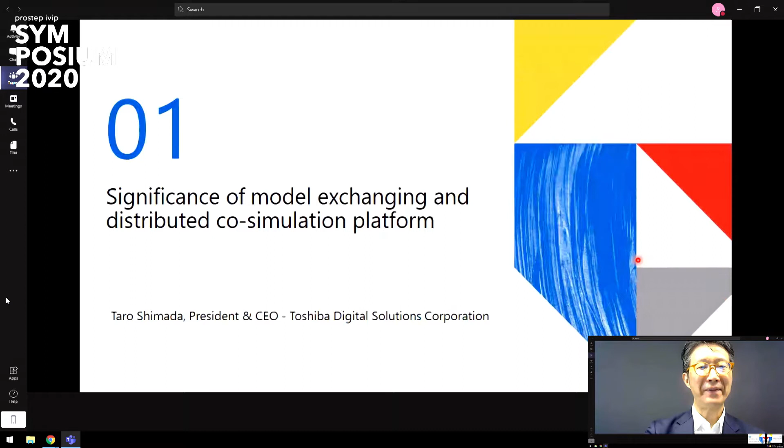So the first thing I'd like to explain is the significance of model exchange and distribution in the co-simulation platform. With this audience, I don't think I need to explain in detail, but we need to front-load much more in design, in a digital simulation way, so that we can do a much more effective job. Not because of COVID-19, but it's a big theme of system engineering anyway. At the same time, this requires the OEM and suppliers working collaboratively, easily and very tightly together, but they also need to respect their intellectual property. And there's a challenge in that there are all kinds of different tools that we use to do the simulation, and sometimes it's very difficult to exchange the model itself. Actually doing a co-simulation is quite a challenge in front of us, I think.

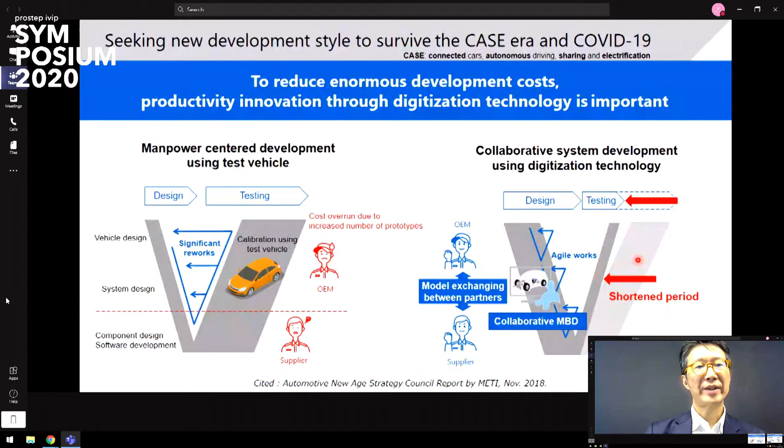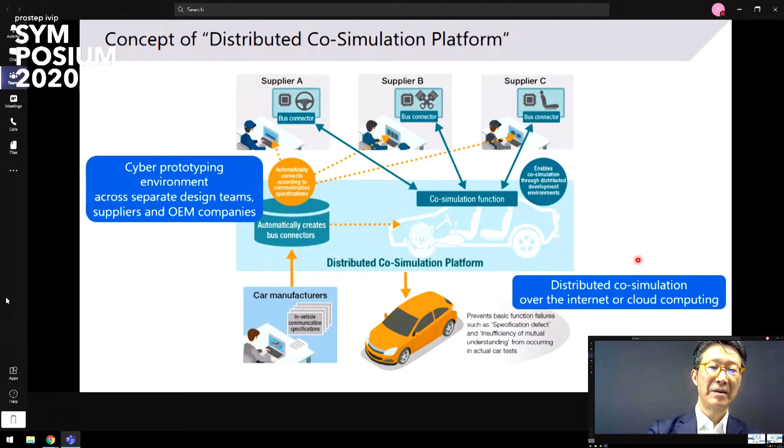On top of this, we actually make it a much more platform-like software, so that you can simulate different types of software all together at the same time. Maybe it's easier to explain with the next slide I'm showing right now. All these different software have already been tested and are working, meaning all of them co-simulate at the same time. Basically we use the FMI interface to do that, so that in theory any software which complies with the FMI standard should be able to do the same.

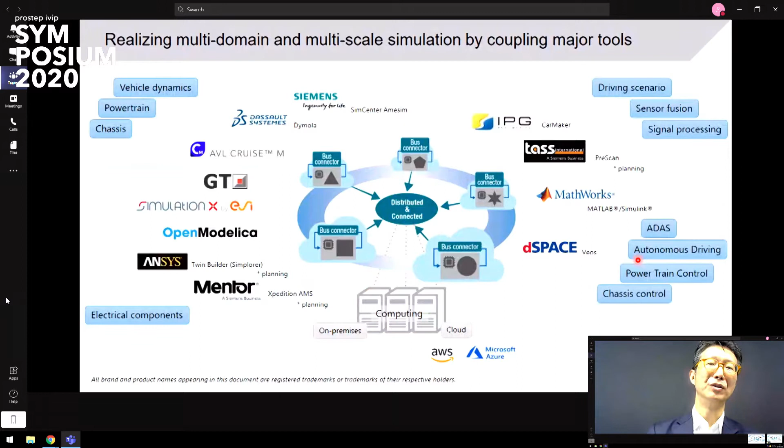We are actively working very closely together with standardization organizations. Here in Japan, METI, the Ministry of Economy, Trade and Industry, is leading the activity of the model-based design working group, and we are working very closely together with many Japanese companies, supplying all those technologies to be able to do this kind of co-simulation.

At the same time, we are happy to join PROSTEP, because this is not only a problem for Japan, this is kind of a universal problem that we have. We think we can contribute to the global supply chains for the people who really need to do co-simulation together.

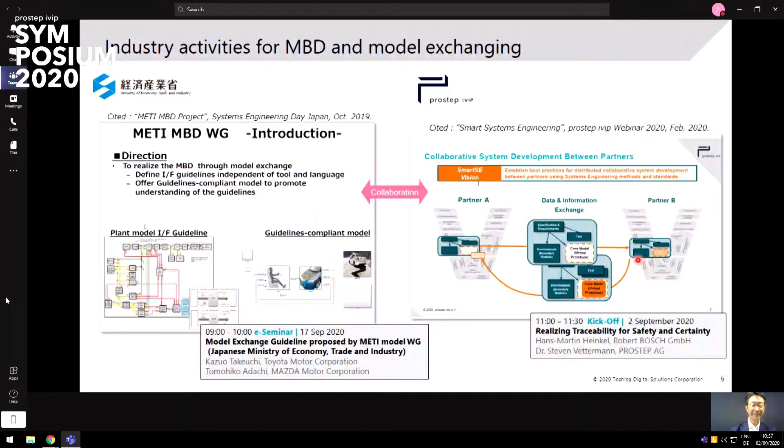So I wonder, this story is too good to be true. Then people are wondering how, is that really true, and so forth. Dr. Araki is going to explain about that in detail, how we solve this problem. So without further ado, Dr. Araki. Thank you, Mr. Shimada.

From now I will explain the details about the distributed co-simulation platform technology and its applications.

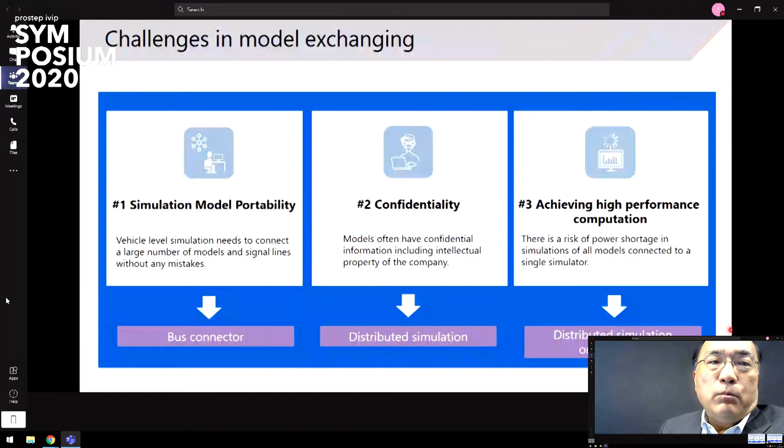Today I want to explain three problems in model exchanging, and on the other hand show how to solve these three problems. The first is the portability of simulation models to exchange across companies or partner teams. The second problem is the confidentiality of the models. The third topic is how to achieve high performance computation in building large-scale co-simulation.

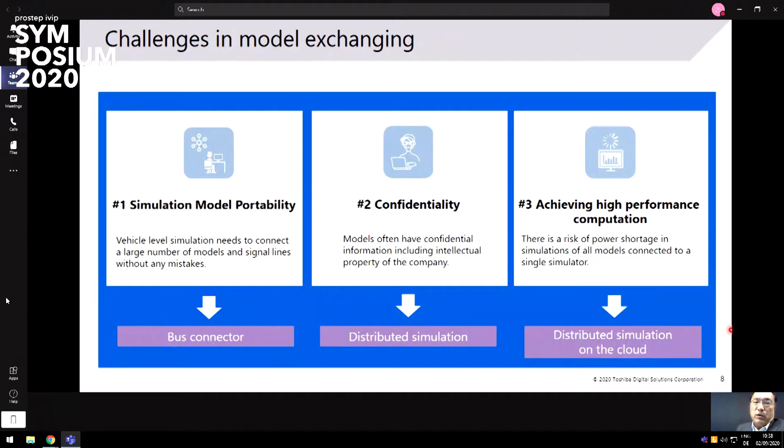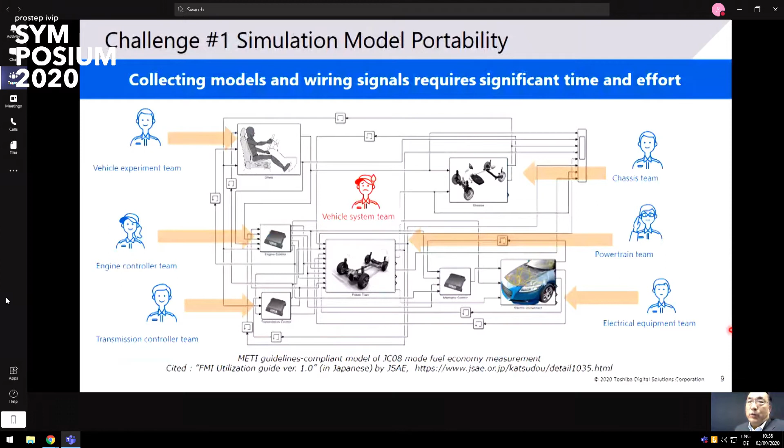The first problem is the portability of the simulation model. This is one example of a vehicle-level simulation model developed by the METI model-based design working groups for calculating the fuel economy measurement of vehicles.

To make this kind of simulation, the vehicle system designer needs to collect the unit models from their partners. For example, the engine controller needs to connect with the transmission controller, or some chassis model, or powertrain model. This kind of model needs to be collected, and wiring the many signals requires very significant time and effort for building the whole simulation.

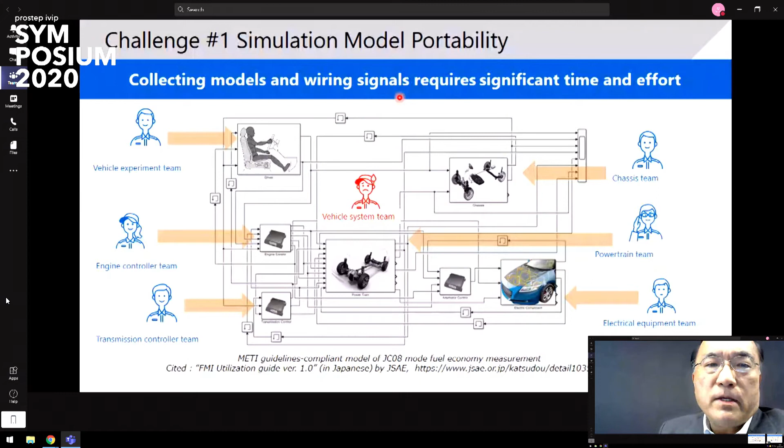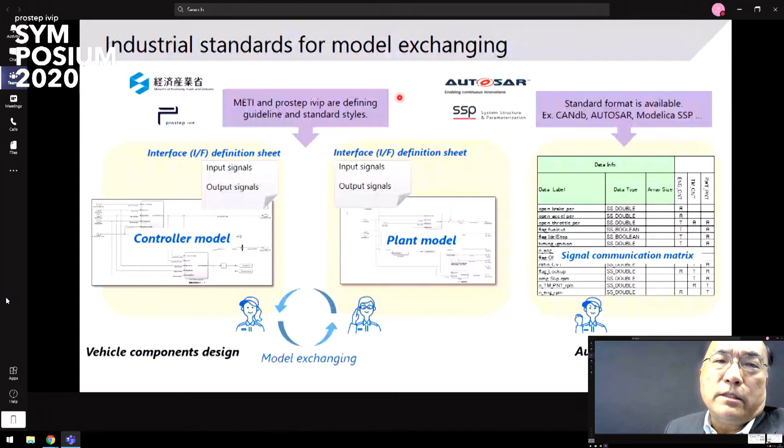We have a current industrial standard for model exchanging. METI and PROSTEP are defining the guideline and standard styles for model exchanging.

The basic concept is that designers have their own model, and they write interface definition sheets for attaching the model, for handing it out to others. This definition sheet mainly defines the input signal and output signal, along with some definitions or behaviors.

On the other side, at the vehicle system level, people are defining some standard format for designing the specification at the vehicle level. The main point is that this sheet contains the list of signals communicating between units, and there is some kind of matrix defining who is the transmitter and who is the receiver.

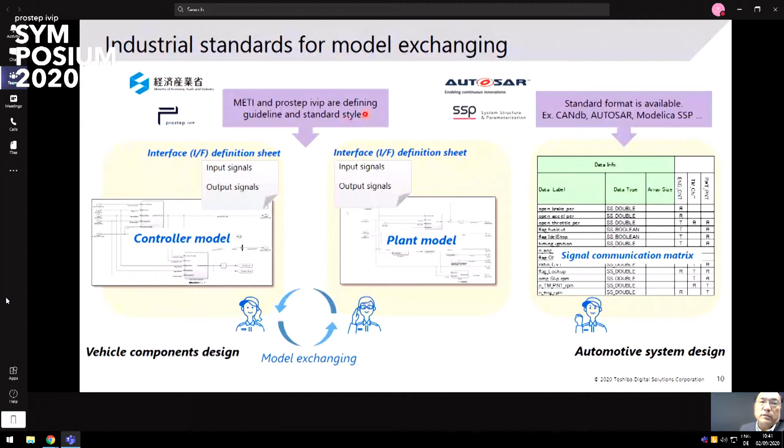This is some industrial standard for model exchange. Our idea is named bus connectors. This bus connector is the communication unit for each model unit to communicate signals with other model units. The bus connector can be automatically generated from the interface sheets of each model.

From the other side, the co-simulation controller can provide several services for making the co-simulation. The signal communication matrix can be loaded from the co-simulation controller, and then this controller will create services for signal transactions, connecting the model units with each other. The controller can also provide a service for time synchronization to make synchronous co-simulation between model units. That is our main idea.

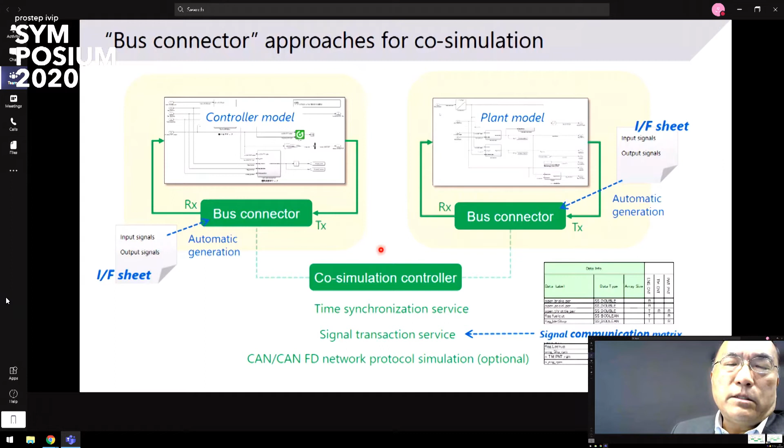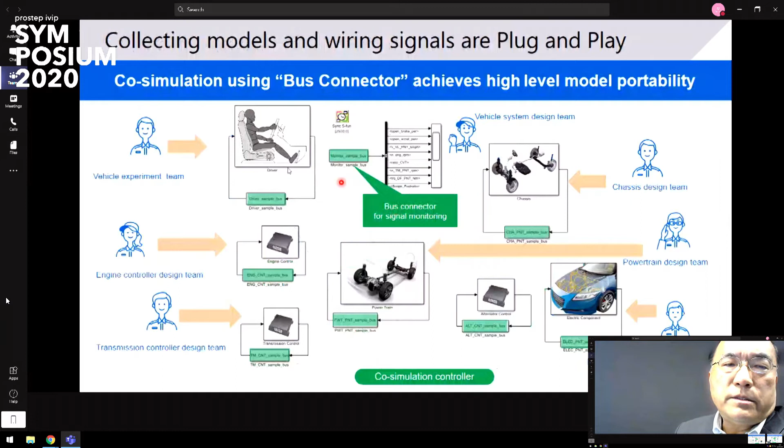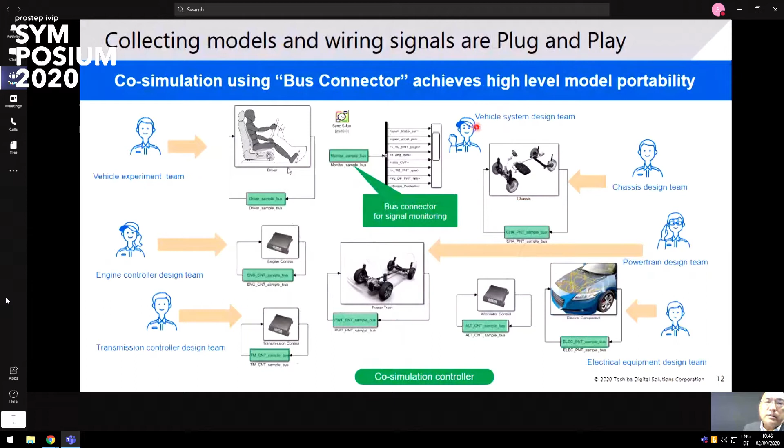When introducing our bus connector approach, each model unit and bus connector composes one model part for delivering to others. So if we introduce the bus connector approach, co-simulation becomes very easy, because we don't need to wire each model together to make the simulation—just collect the models, and everything can be done in a plug-and-play style. This approach achieves a high level of model portability.

The bus connector approach can also solve the second problem: the confidentiality of the models. When handing over models between companies, the company needs to care about the concealment of the model. In some cases this is a very critical issue, because the controller model itself contains their own intellectual property, so the company needs to care about how to pass the model between companies.

When using the bus connector approach, we can make the distributed CoSimulation. In this case, the company and design team does not need to hand out their own model to others, so we don't need to worry about the concealment of the model. This is one merit of the bus connector approach.

The bus connector approach also easily solves coupling between different tools and models on separate locations. The FMI, functional mock-up interface, is the standard for exchanging models. The typical usage for FMI is that design team A exports their own model into the FMU and delivers it to other teams. The other team may import the model, do some wiring, connect their own model, and make the CoSimulation.

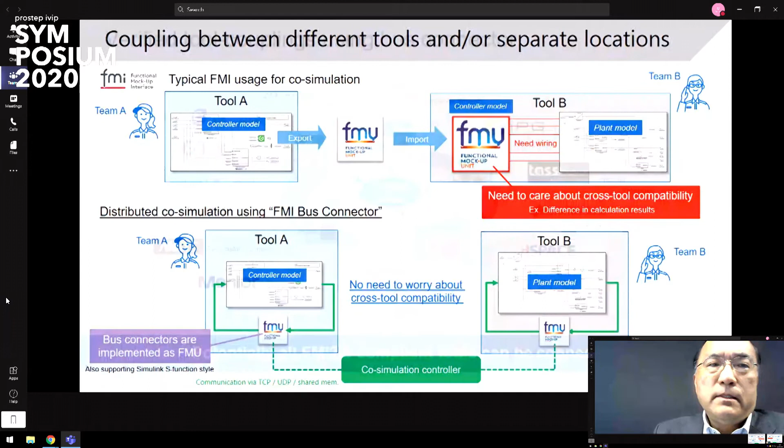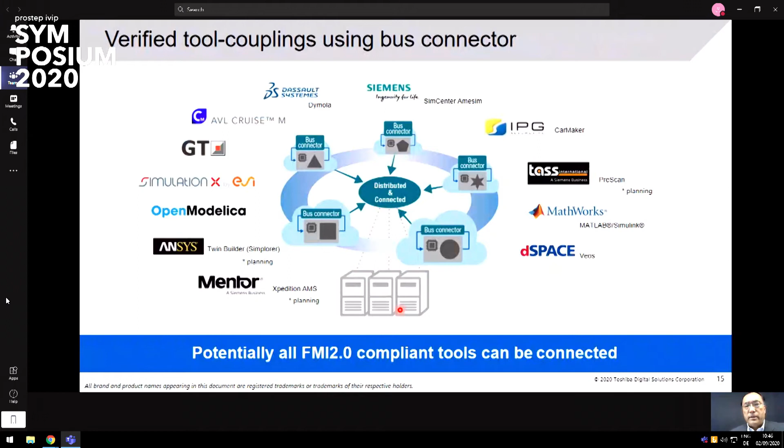So we have verified these tools using tool couplings via the bus connector approach. These are the tools and tool vendors who helped us confirm this experiment. I think potentially all FMI 2.0 compliant tools can be connected with this approach.

Now I'll show you some demonstrations of our approach. The first one is the standard CoSimulation, with all of the model units calculating the JC08 mode fuel economy measurement in one simulator tool.

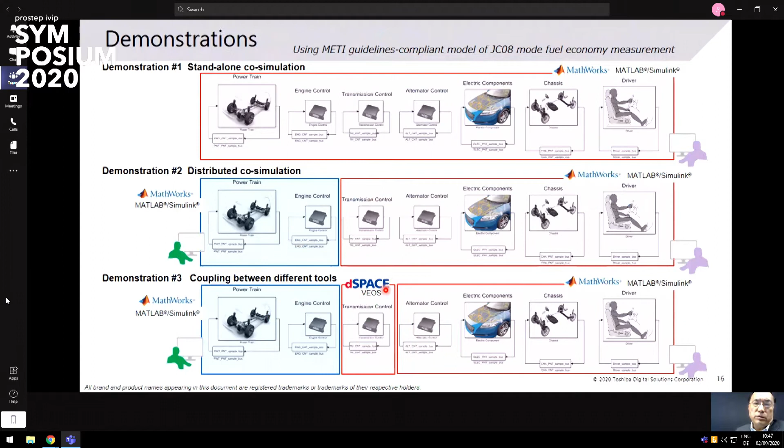The second case is that we distribute two parts, with some models executing on another MATLAB/Simulink at another PC. The third case is that we use another tool, and in this case we showed VEOS.

In the first demonstration, we collect every model unit in one Simulink tool and start the simulation. The left side screen is our CoSimulation controller. It will detect that all models are connected and then start the CoSimulation. All of the models are collected in the one single Simulink tool, making the CoSimulation for fuel economy measurement.

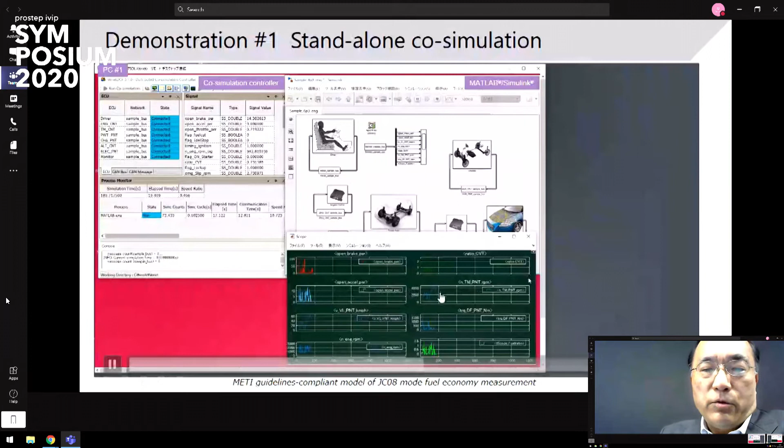In the second simulation, we start the second PC and the second Simulink tool. On the second Simulink tool, we have our powertrain model and engine controller model, and then start it. Our CoSimulation controller can detect that the two models are connected on the left side window. On the middle one, we don't need our powertrain model and engine control models, so we delete those two model units and start the simulation.

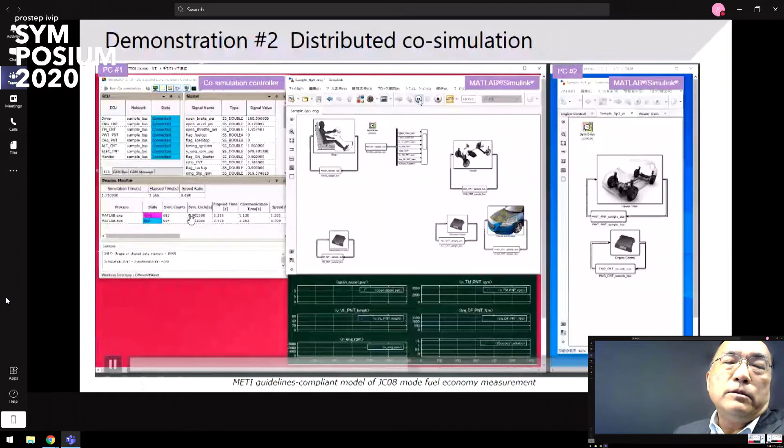Now every model is collected, so the CoSimulation can be started, with in this case two instances of MATLAB running simultaneously.

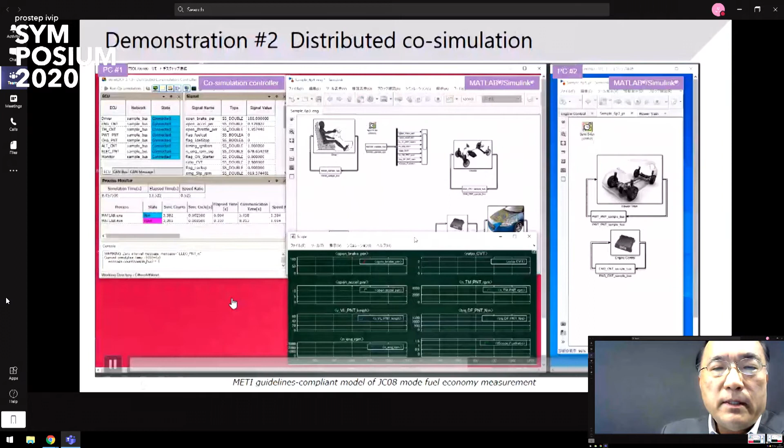In the third demonstration, we start another tool. In this case, I'll show the VEOS simulator. In VEOS, we load our transmission controller model and the bus connector of the transmission controller, and then start the simulation on VEOS.

Now the CoSimulation controller can detect that the transmission controller model is connected. In the middle Simulink tool, we don't need the transmission controller model, so we delete it and start the simulation.

Some of the models are connected, and then the second simulation starts on another PC. All of the models connect, and the simulation starts. As shown in this simulation, our bus connector approach provides a very high level of portability of the model, allowing cutting, deleting, replacing, and moving pieces of the simulation.

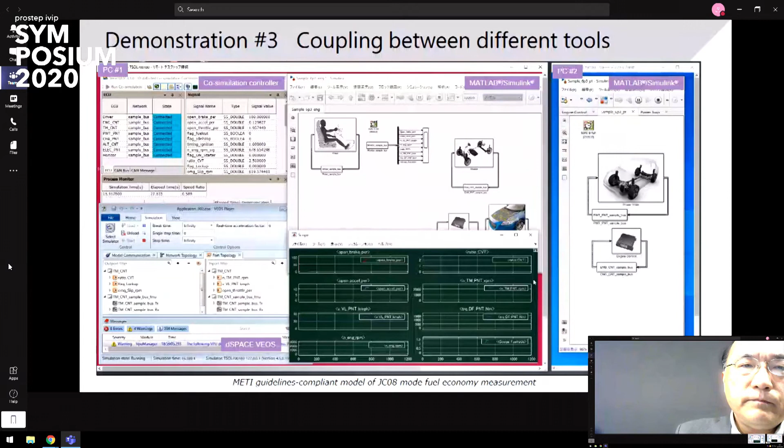This slide shows some challenges and solutions for achieving high performance computation for co-simulation. To make a big level simulation, we need to choose the right tool and computation platform to run the co-simulation. In the previous fuel economy measurement simulation, we need 1,200 seconds of real-time driving.

In the first simulations, we ran similar tools on the same machine, so we had about 300 seconds to execute the simulations. But doing the same simulation on two separate PCs with a wired LAN, it takes a longer time.

And if we're using some public wireless LAN to make the co-simulation, it takes a very long time to execute. It can be used, but on the other side, we are proposing to use cloud computing service for this simulation.

On the cloud servers, we can use very high speed networks to connect the virtual machines, so that we can execute a very high size simulation at a reasonable speed. So the ideal computing environment for high performance simulation is what I propose: the cloud for simulation.

In this solution, every design team will have their own virtual machines on the cloud, and the co-simulation can run within the cloud. This is a practical solution for making big size simulation.

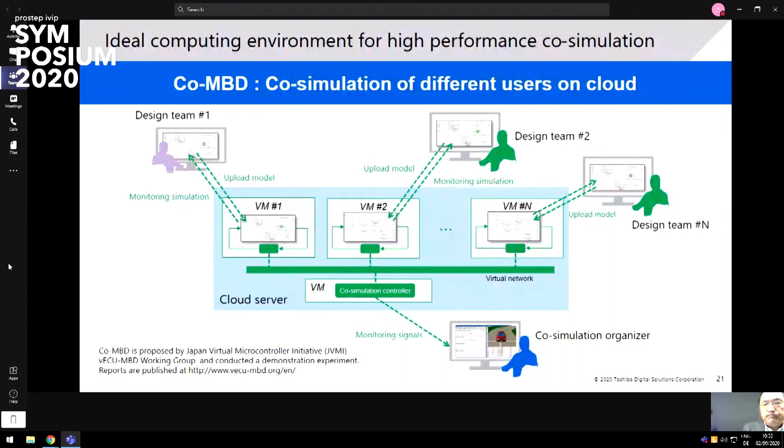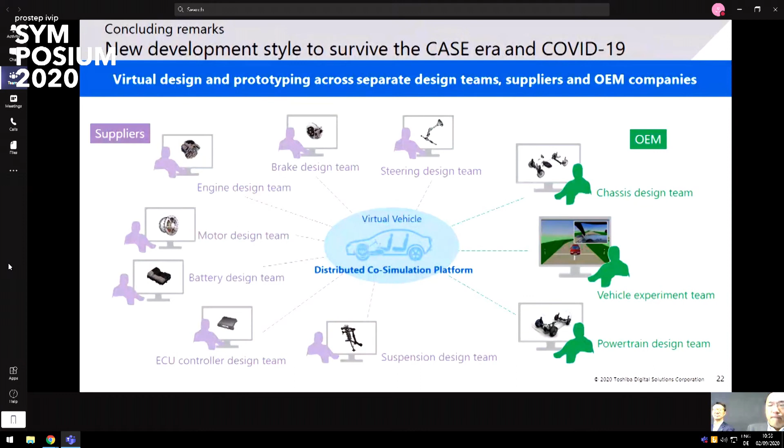My presentation is over. Thank you for listening.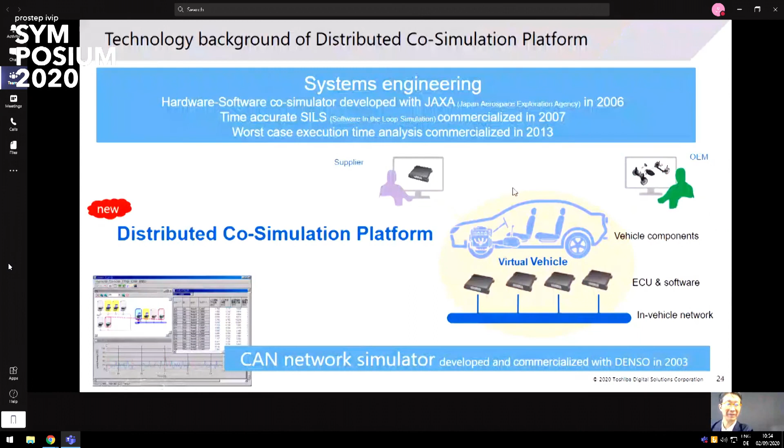Then I will take them from the top. The first one is from Eric. These are actually two questions. First of all, thank you for the presentation. The first question is, can you handle different co-simulation time steps, meaning some models run with a fixed time step, others with a variable time step at the same time? Is that possible?

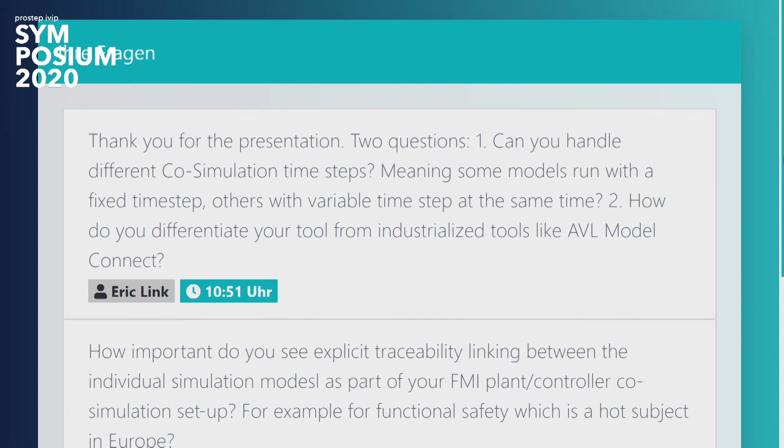Yes, our platform can handle different time steps of the models. Our co-simulation controller has a kind of time synchronization service. This service also handles the different time steps of the models running.

Thank you, Dr. Araki. The second question, also from Eric, is how do you differentiate your tool from industrialized tools like AVL Model Connect?

Okay, from my understanding, every tool currently is a standard co-simulation tool. That means many modules can be collected in one simulation environment and run together. That is the approach. Our approach can handle both the standard co-simulation approach and the distributed co-simulation approach. Between the two cases, it depends very much on the actual use case. We can select either approach.

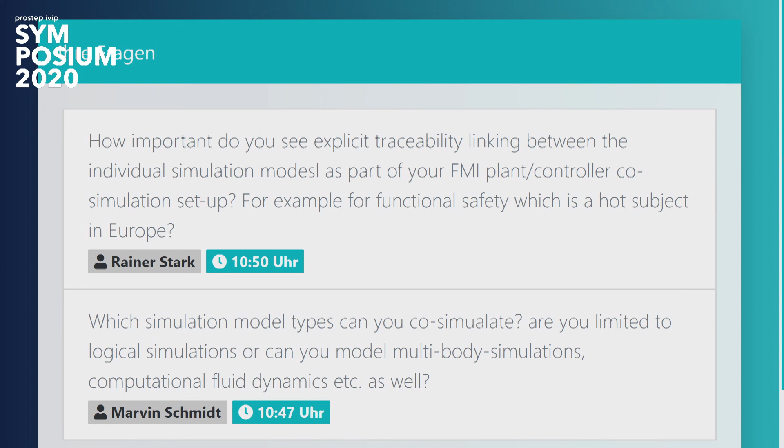Moving along from Rainer, gentlemen, we have the following question. How important do you see explicit traceability linking between the individual simulation models as part of your FMI plant controller co-simulation setup? For example, for functional safety, which is a hot subject here in Europe. Gentlemen, what is your take?

So, I cannot quite catch the point of the question, but maybe co-simulation is very practical for solving such kind of functional verifications. For example, in case of unit testing, they don't need to care about the other parts. So this kind of co-simulation will be a practical approach for making functional safety. I'm sorry, that's my mind on it.

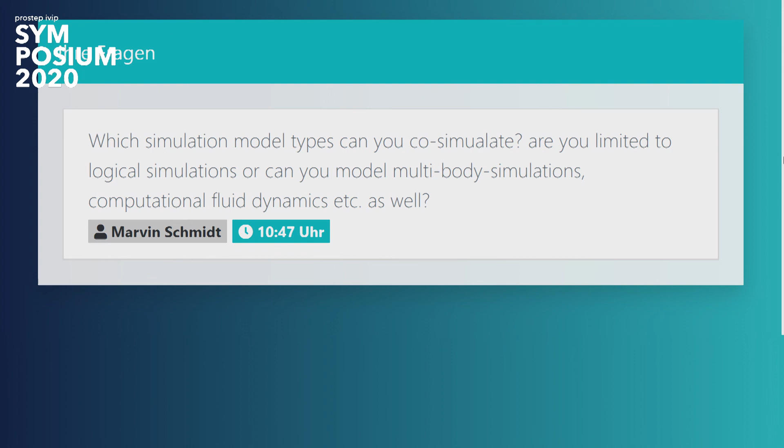Thank you so much, gentlemen. I have one last question before we close for this slot. Which simulation, Marvin asks, which simulation model types can you co-simulate? Are you limited to logical simulations, or can you model multi-body simulations, computational fluid dynamics, etc. as well?

Okay, so basically our platform supports FMI as the standard for the model engine. So this platform has the same limitations as FMI. We basically need to develop more advanced features for the FMI standard. I guess the easy answer would be that if the simulator has FMI integration, it should work. Right, so if that is given, then it should work.